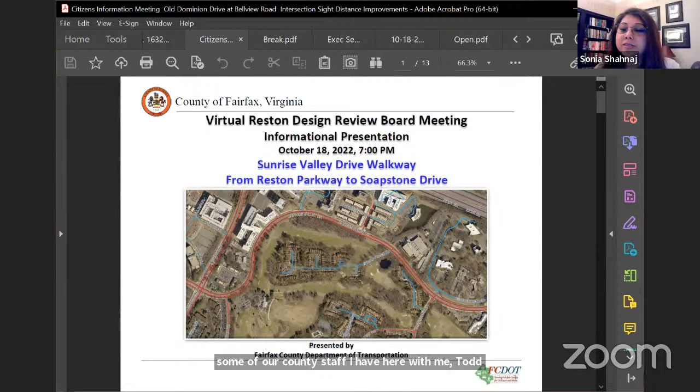I have Nicole Wynand, our bicycle coordinator, and I see Nagin, she's also with our capital project. I also have our consultant, Matt Kaiser and Andy Moy. Can you just show your hand? If you're not here, that's fine.

I am going to start my presentation with a brief description of the project purpose, and then I'm going to go into detail with the proposed improvements. I will take any questions at the end of the presentation. Next slide, please.

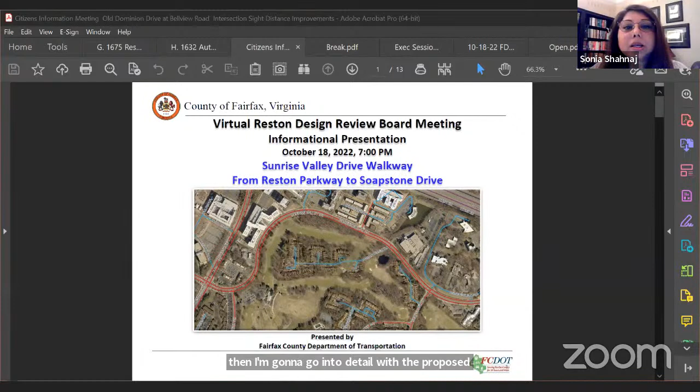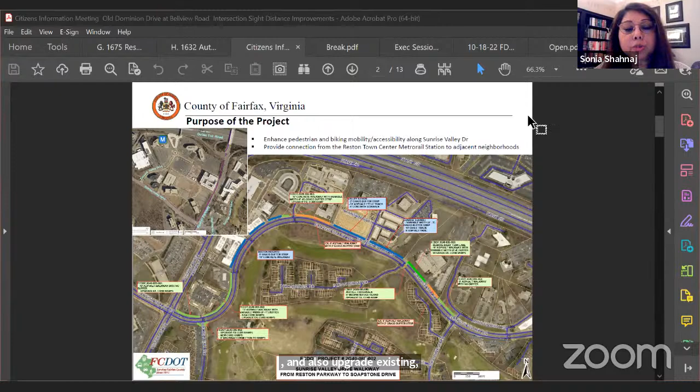Sunrise Valley Drive walkway is a Reston Metrorail Access Group recommended project. This project will construct the missing segments and also upgrade existing bike and pedestrian facility from Reston Parkway to Soapstone Drive along the north side of Sunrise Valley Drive.

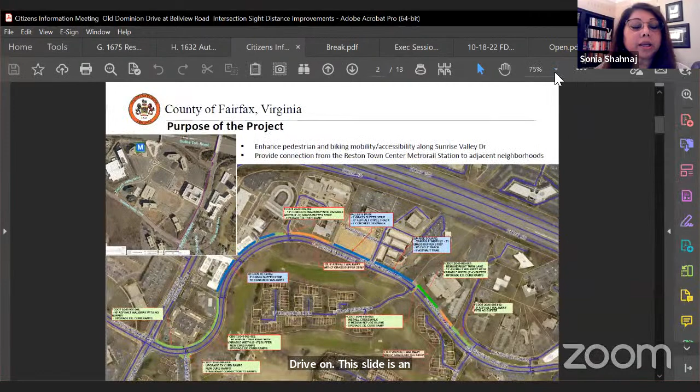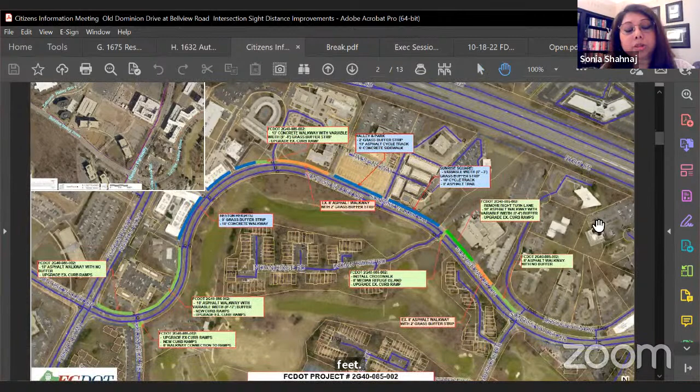On this slide is an aerial photograph of the existing bike and pedestrian facility. The blue line on this aerial shows the recently constructed bike and pedestrian facility as part of the new development. On the left, the blue line shows an 8 feet buffer strip for a 10 feet concrete walkway installed as part of the Reston Heights development. On your right, the blue line shows a 10 feet asphalt cycle track with 6 feet walkway installed as part of the multifamily residential development.

The orange line shows the existing 8 feet asphalt walkway that are in good working condition. In the middle of the aerial photograph, you can see the 8 feet asphalt walkway east of the hotel entrance. On your right is also an existing 8 feet asphalt walkway with 2 feet grass buffer west of Association Drive.

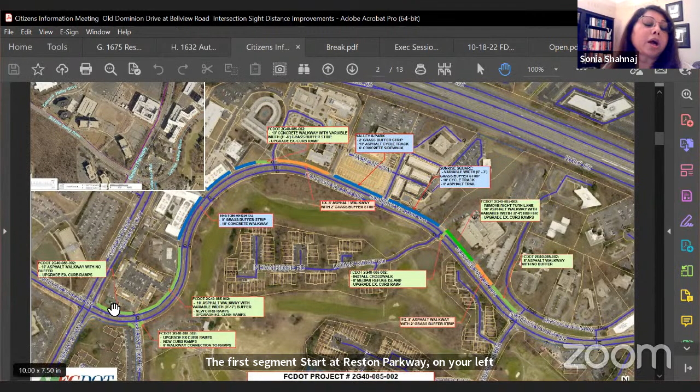The green line shows our proposed development in 3 segments. The first segment starts at Reston Parkway on your left. It will be a 10 feet asphalt walkway with variable buffer, which will connect to the Reston Heights facility. We are also going to upgrade the existing curb ramps and install new curb ramps shown in green at Colts Neck intersection. The second segment is by the hotel entrance, where we're replacing the 5 feet section with a 10 feet wide concrete section.

The green line in the middle is by the hotel entrance, where we're replacing the 5 feet with the 10 feet. On your right is our third segment, where we are installing a new crossing at Indian Ridge Road. We're also installing a 10 feet walkway between the entrance to the commercial office building with a 5 feet buffer. And lastly, we are replacing an existing 4 feet section west of Soapstone Drive with an 8 feet asphalt walkway.

Once complete, this will provide continuous pedestrian and bike facilities along this corridor. It will also provide connection to the metro rail station shown on your left on the inset, on the top left corner of the inset.

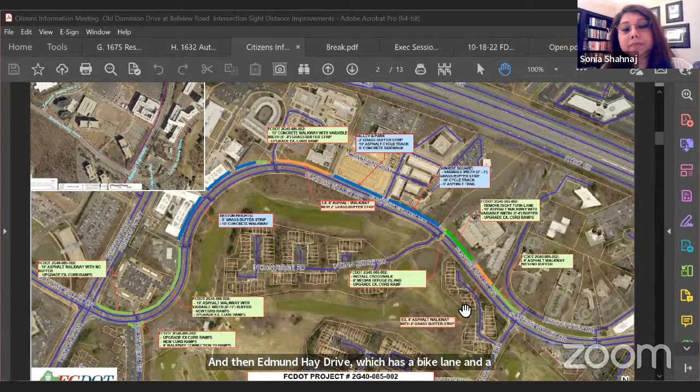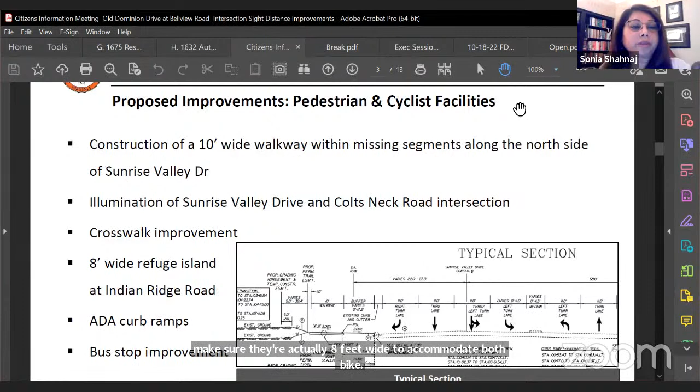As I just mentioned, we are going to install a 10 feet wide walkway within the missing segments along the north side of Sunrise Valley Drive. We are also going to upgrade existing facilities to make sure they're at least 8 feet wide to accommodate both bike and pedestrian traffic. Below is a typical section of the 10 feet walkway. We are providing a variable buffer between the existing curb and gutter section and the new walkway. We are also including additional safety improvements, including illumination of the Sunrise Valley Drive and Colts Neck Road intersection.

We are also including a high visibility crosswalk within our project scope. An 8 feet wide refuge island will be installed at Indian Ridge Road, which I will show later in detail, for pedestrians crossing multi-lane Sunrise Valley Drive. Throughout the project, all the curb ramps will be widened, and we'll make sure that they are ADA compliant. We're also improving the bus stop within our project limit.

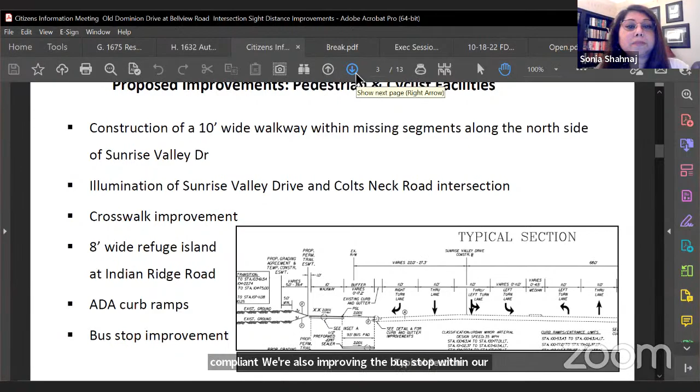This slide shows the proposed design plan for the 10 feet walkway at Reston Parkway. The walkway will be an asphalt walkway and is shaded in green. The orange and red lines are the existing utilities in this area. You can see there are lots of utilities, and I have counted at this intersection, at the corner, there are as many as 30 different lines at this location. The light browns represent the existing office building.

The 10 feet walkway is curb-abutted on the west of the entrance to the office building at Colts Neck, and this is to avoid and reduce utility impact.

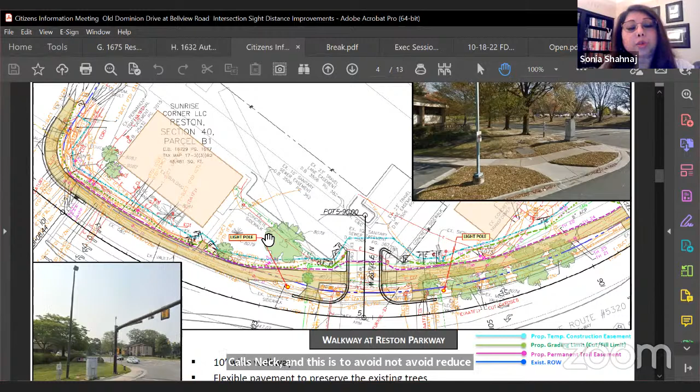Initially, we proposed an 8 feet section on the west of this entrance to the office building, to avoid the relocation of the signal pole and cabinet shown in the picture at the bottom left of this slide. We updated our design. Now it is a 10 feet walkway section based on the recommendation that we received from the Supervisor's Office, Reston Association, Transportation Committee, as well as Fairfax Bike and Fairfax Association for Better Biking.

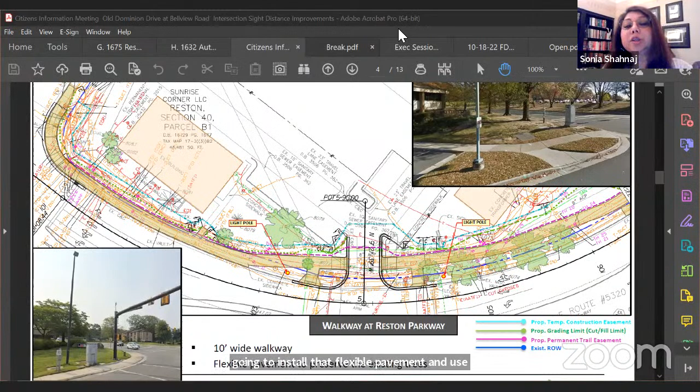We will have to adjust the signal pole and the cabinet to accommodate a wider ramp at this intersection. On the west of this entrance, we are providing a wider buffer, and we're also going to install flexible pavement and use other tree-saving techniques to save the trees, as shown in the picture at the top.

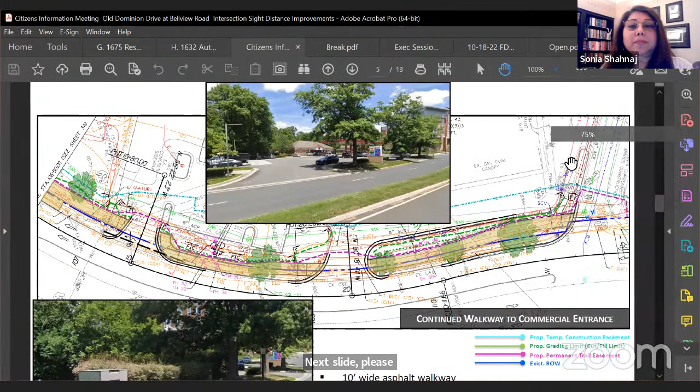This slide shows the continuation of that 10 feet wide asphalt walkway all the way to the gas station. We are making sure our ramp aligns with the existing facility at Reston Heights. The walkway is again curb-abutted because it avoids the relocation of the transformer, shown in the picture at the bottom of this slide. At the top of the slide is a Google Street view of the gas station. We are removing their second entrance on the east.

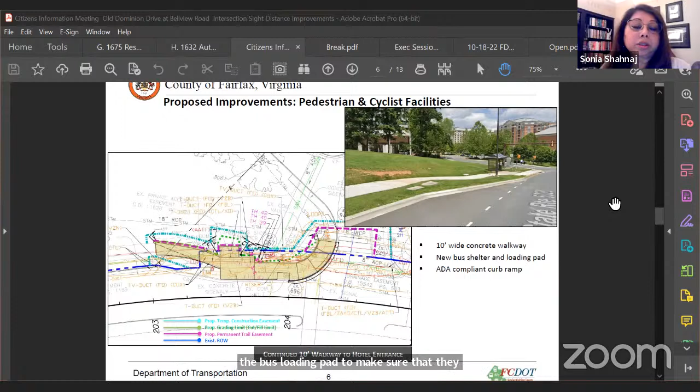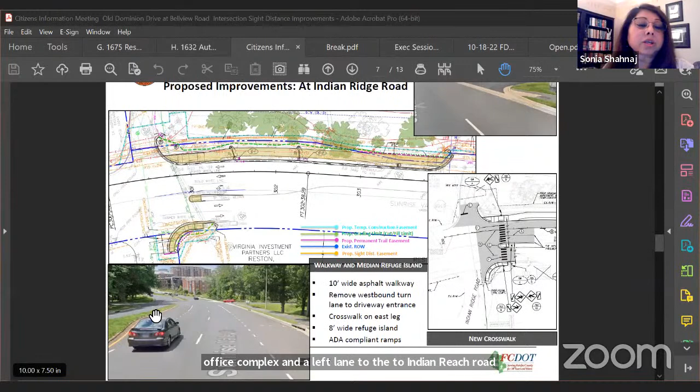Below is a picture of Sunrise Valley Drive at Indian Ridge Road. As you can see, this is a 6-lane section, including the right lane to the office complex and a left lane to Indian Ridge Road. We are proposing to remove this turn lane for a shorter crosswalk width. This will provide a safer crossing. We have prepared a traffic study which supports the removal of this turn lane.

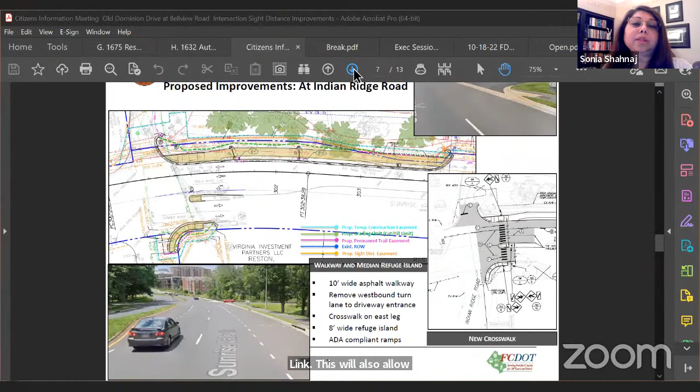This will also allow us, if you scroll up a little bit, to align our new crosswalk with the existing crosswalk, as you can see on the top of the slide. This will be an unsignalized crosswalk, so that's the reason we want to make sure it is safe.

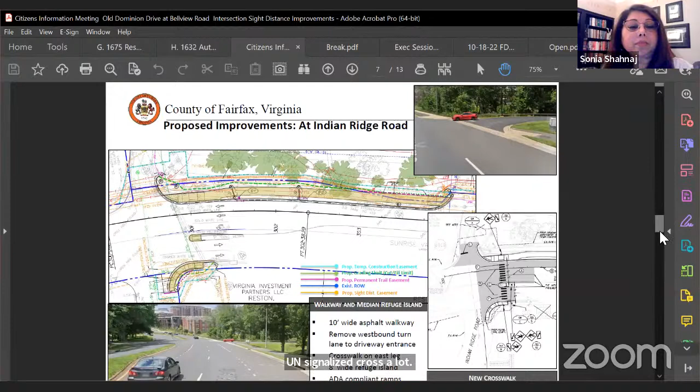This is our last segment of improvement, where we're replacing the existing 4-feet section, as you can see from the picture below, with an 8 feet wide asphalt walkway all the way to Association Drive. This will provide a continuous 8-feet section to Association Drive. You can see the picture at the bottom. This is an existing 8 feet asphalt, and we're replacing that 4-feet section.

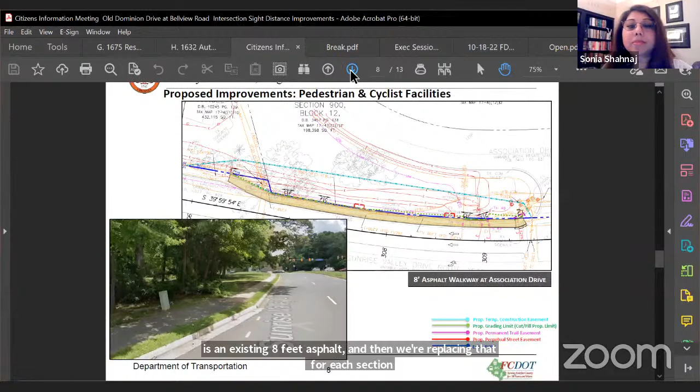This slide shows the location of the new light pole at the Colts Neck Road intersection. We are proposing new lighting to illuminate the crossing at this intersection. The lighting fixtures and pole will match the current Reston area lighting fixtures. The light pole is going to be a dark bronze finish with a smooth tapered pole. The fixture will be a shoebox style with LED luminaire, also with a dark bronze finish. We are coordinating with our streetlight division and also Dominion for the lighting design.

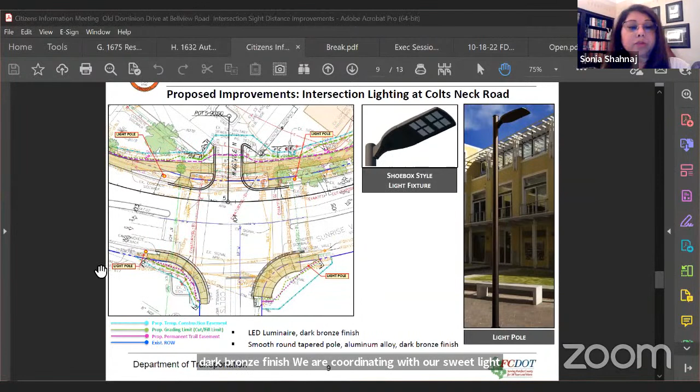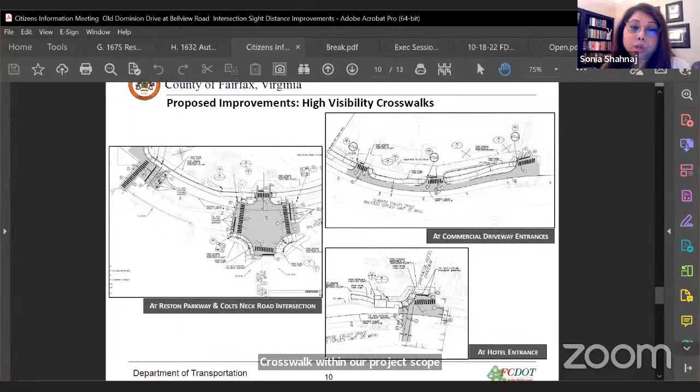This slide shows the proposed high visibility crosswalks within our project scope, in addition to the one at Indian Ridge Road. On your left are the high visibility crosswalk at Reston Parkway on the west leg of Sunrise Valley Drive, and the high visibility crosswalk at the Colts Neck intersection. We are also installing 8 APS pedestrian signals for the 4 crossings at this intersection.

On your right are the proposed high visibility crosswalks on the driveway entrances all the way from Reston Parkway to the Reston Heights development. At the bottom is the proposed high visibility crosswalk at the hotel entrance. The existing sidewalk and crosswalk in some areas are standard 2 parallel crosswalks. We are improving the existing crosswalk with a high visibility crosswalk in some areas, and also installing new high visibility crosswalks.

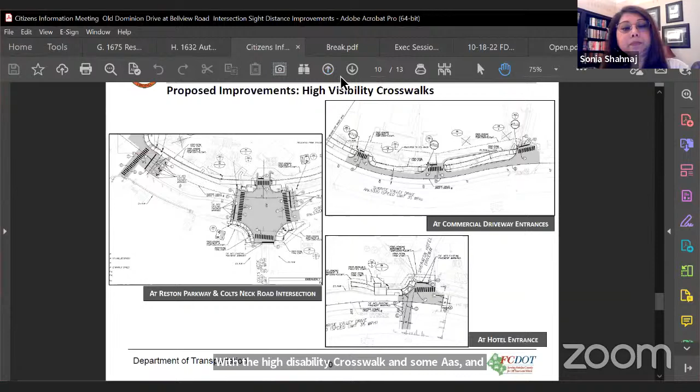We will need land rights for our proposed improvements. This slide shows the type of temporary and permanent easement that will be needed for this project. The blue line shows the existing right-of-way.

The trail will be maintained by the county, so we will need a permanent trail easement for the perpetual maintenance of the trail, shown in purple. The green line shows the proposed grading, and the lighter blue or turquoise line is the temporary construction easement for the grading. Once construction is complete, this temporary easement will go away.

We will also need sight distance easement, not shown on this plan, at Indian Ridge Road for the new crossing, and some perpetual street easement by Association Drive to relocate some of the existing road signs.

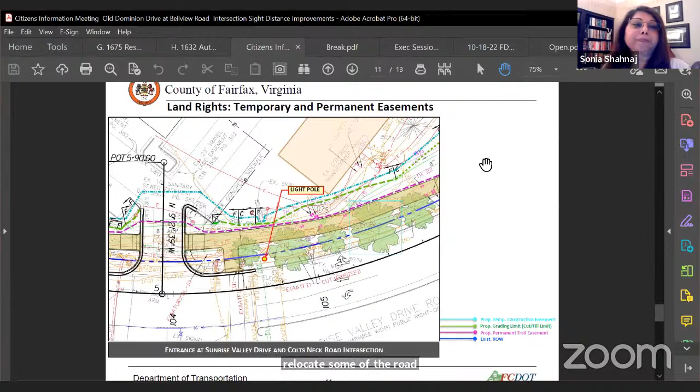We are finishing up our final design and should complete it by next month. We have already started our plat and utility coordination.

We will initiate land acquisition once the plat is complete. We should start the land acquisition process by winter 2022 and expect to complete it by winter 2023. Initiation of construction bid advertisement is fall 2024. Once utility relocation is complete, we expect to start construction by winter 2024, with scheduled completion by fall 2025. This concludes my presentation, and I'd be happy to take any questions or comments.

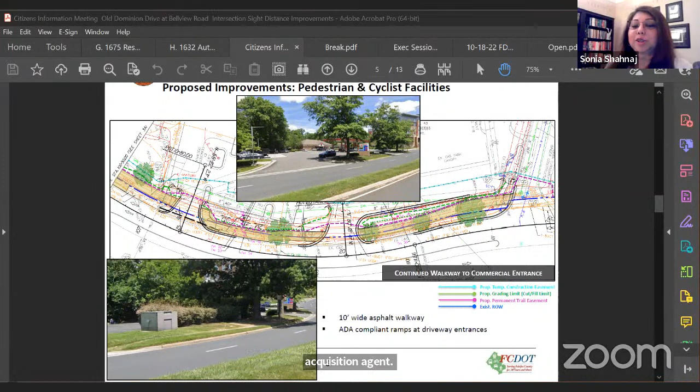Is that something that can—I know you said you have compensation for trees that potentially would die—but what about these trees that are part of the compensation package you're giving to the property owner? Yes, so we have not started that discussion with the property owner yet. It starts once we finalize our plats.

Sarah, our land agent, explained she's been out to the property several times to see where the impact will be, in addition to reviewing the plans. When she makes the offer to the gas station, they will be compensating for the loss of trees, or offering to replace them with trees of their choice from a list. How they choose to rectify that is a personal decision for the company. We can't legally bind them to replacing those trees once we've compensated them for that loss.

I don't know if Tony's on, but I believe I, as the DRB, can tell them no if they came to me and said they want to cut down 4 trees on their property. There might be a way I can parlay that together with a requirement on our end, because the only reason these are the 4 trees I'm most concerned about...

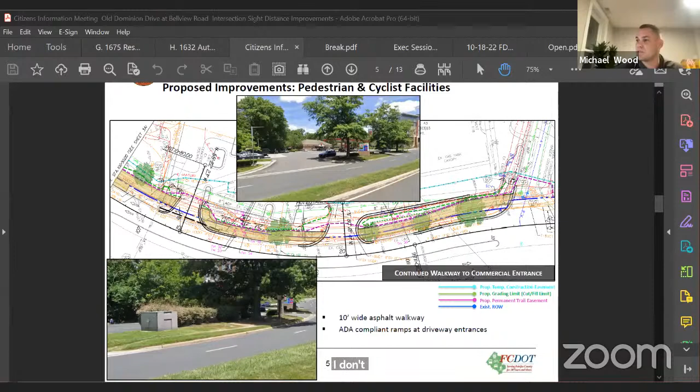I'm excited for you guys to try some FlexiPave or flexible pavement. I know FlexiPave is one brand I'm aware of, but hopefully it will work and be something you guys can implement in other places. Does any other members have any other comments?

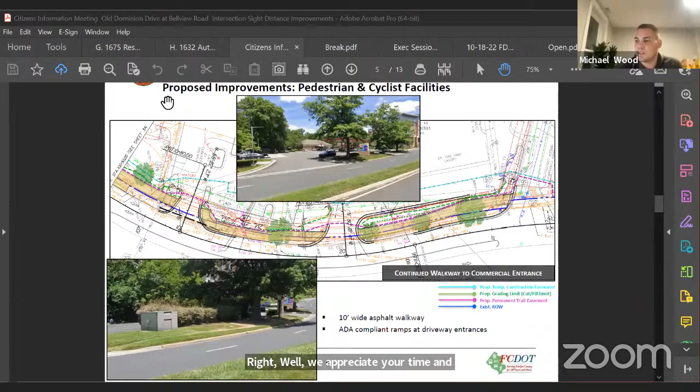All right, moving on to application G, which is 1675 Reston Parkway, Suite J and K. Got a sign application, I believe, or an appeal of a sign application. That is correct.

Did you have the appellant here, Daniel? Daniel, if you're on, could you raise your hand? Mr. Lowe or Mr. Pence? If you're calling in by phone, you can unmute yourself by dialing star six.

Did you want to defer to the end? I could give them a call. I see someone on, last 3 digits is 519. And they're not muting. I don't have anyone else.

Okay, well since it's an appeal, I can't really accept the application unless they're here to appeal it. So I'll make a motion to defer it to the end of the agenda and give them some time to get on. Do I hear a second? Second. Second. All right, we have a first and a second.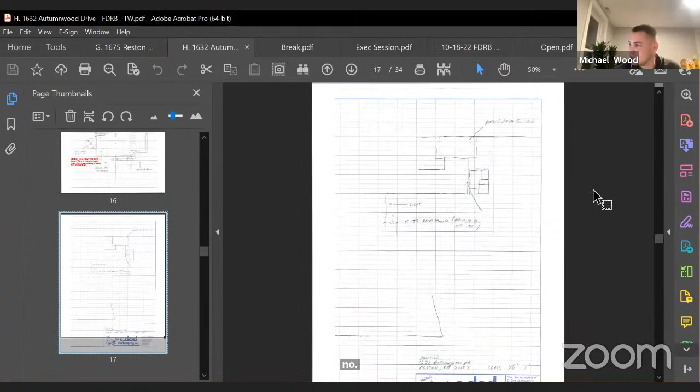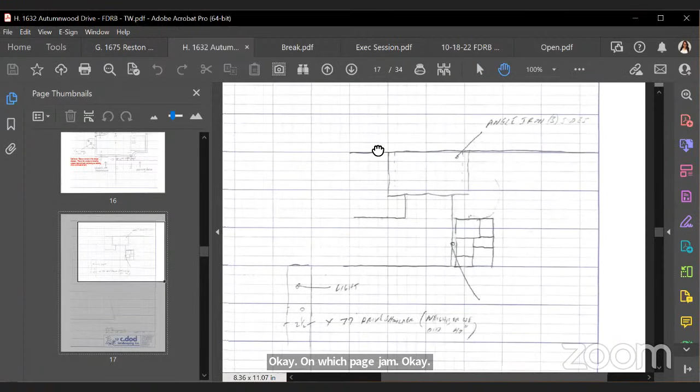So I don't have any questions minus that width of the driveway border. Yeah, it does say 2 2/3. I'm looking at it as well. The drawing on page 17 shows 2.5 by 77. Okay, on which page, Cam? We're pulling it up now, but it looks like 2.5 by 77. Okay, yeah, so we'll just want to clarify exactly what that is. Getting closer to 3 feet is a little big, but with the paver it may make sense to do 2 feet 8 inches, and that might be why that was one of the dimensions. It might work out perfectly where you have a nice cohesive design. I'm sure there was some thought behind it because it's a bit of an odd dimension request. Yeah, so there might be a reason why they did that size.

So what I'll do is put in the motion that we can clarify 2'6" to 2'8", depending on final paver arrangement or something like that. Okay, does anyone have a motion they want to make? Any discussion that we want? I'd like to move that we approve the revised design.

Okay, we have a motion. Do I hear a second? Second. We have a motion and a second. The only thing I would ask is that we basically say the dimension is anywhere from 2'6" to 2'8" based on paver arrangement. Do you accept that amendment, John? I do. And Brian, do you accept that as a seconder? Yes. All right, we have a motion and a second, we've had some discussion, we had an amendment. All those in favor of the application, say aye. Aye. Any against? Any abstentions? All right, I believe that motion passed, I think we have 8-0.

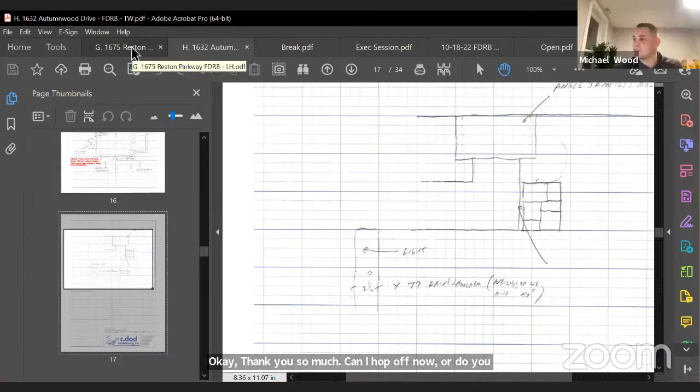All right, thank you so much, Michelle. Okay, thank you so much. Can I hop off now, okay? Do you need me to stay on? You're good, no, we're good. All right, thank you so much. Yep, all right, appreciate it. Thank you, bye-bye.

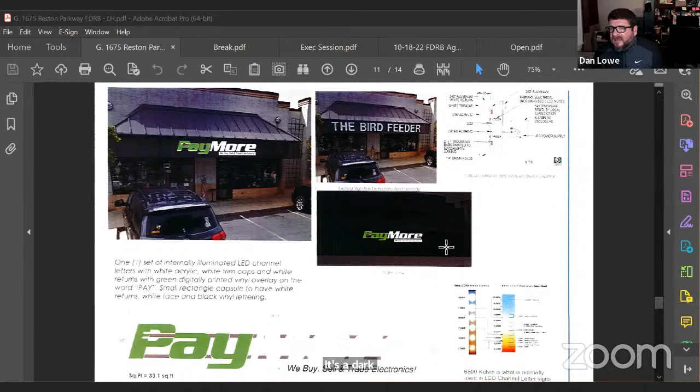Okay, and when you say it's black, are you saying it'll match the awning color, like a black, or is that like a dark bronze? It's a dark bronze, so the lettering won't match that. No, it'll be a black. It'll be a black. Okay, so the words within white, with white words. It'll be white words within a black. Correct.

All right, let me go around and see if anyone has any questions on the sign, and then we'll go from there. I swear this center, all the lights are only white. Are there colored signs in this center at all?

There are. NTB has a colored sign, Senor Ramon's Taqueria too. The newer locations that have opened have started to add color to their signs, but originally the center was all white channel letters. The Home Depot sign is an orangish color as well. But originally, years ago, the bird feeder's been there since 1993, I think. It was the original tenant in that space.

Can I just say that, at least for myself, when we approved this by acclamation, I totally missed the 3,000 Kelvin. That won't produce a white light sign. He's correct. I appreciate that.

I was a bit puzzled myself and figured it had to be something, because all the white signs in there, they couldn't have been done with a 3,000 Kelvin bulb. First of all, I apologize for making you come back for that. And, but...

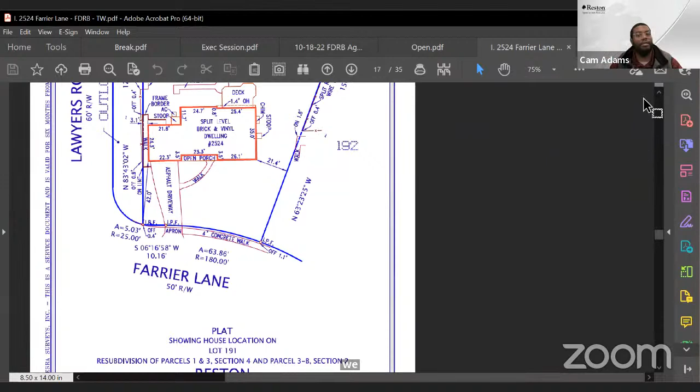Okay, so the new information you're presenting - I'm paraphrasing - is that other neighbors in the neighborhood have board-on-board fencing. Staff, correct me if I'm wrong, but I swear last time you guys had a whole map showing which ones were actually approved by the RA and which were not. I don't see that. We have a map, but on page 15 it shows the properties, and we responded to each property and why they had the fence that they had. Yeah, but where is that now?

We didn't mark it ever. We documented it in a document for the DRB. In the doc for the DRB. So where is that document? It's in the doc that's presented to the DRB, in the actual doc you get with your applications, in the Dropbox - my Word document is what you're saying. Correct.

Let me go to that real quick, because that's what I wanted to reference - I'm trying to remember, because this is a deferral of an appeal, which means we didn't accept the appeal, but I believe we gave you guys some time to maybe rethink the design of the fence, but it sounds like that didn't happen - it's still full height all the way around.

I think we were at the panel, and when we discussed what you had asked us, what we had discussed and said, we had proposed a solution that we thought met the guidelines by running the board-on-board along Lawyers, turning the corner to give some concern for the privacy, but continuing in accordance with the guidelines with the split rail - there was already split rail along the neighbor's border, so it would be essentially closing off the corner with board-on-board, and then continuing to meet the neighbor's split rail. That's what we had discussed as an alternative.

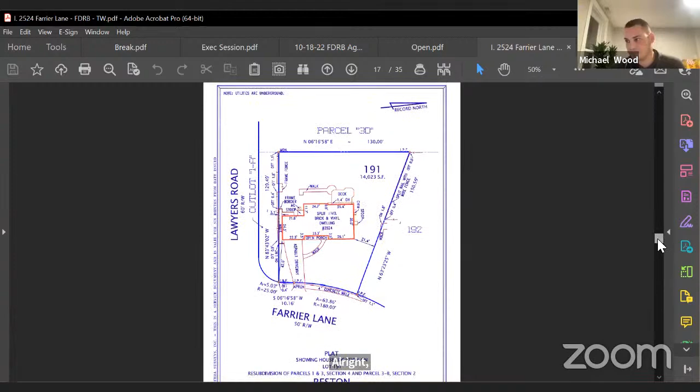All right, so we'll hear the application over again. I think we have a lot of the information.

My understanding of this is I'm all for the board-on-board fence against Lawyers Road. I'm even for turning it around the corner. I think the biggest thing that I remember suggesting, and I don't know if this was ever dug into, I'm just going to jump into it.

Did RA sign this application as an adjacent property owner where a fence is going on the property line? And was that addressed? Did the neighbor sign for the property where this is going? I guess they're proposing a fence directly on the property line once again, and there's already a fence there. So I'm a little confused exactly how that's going to work and what the plan is for maintenance, and our guidelines typically require it.

So did RA sign this application as an agreement? RA: No, we did not. Is there a reason why not? To my knowledge, we have not been requested to sign the application.

But also, our pathways supervisor, who usually sends a comment to support DRB applications, has been out. So that may have also had something to do with it, but we've not been asked, to my understanding.

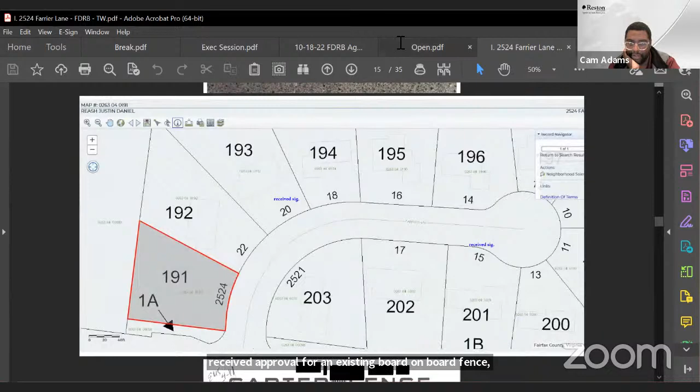Several things. One, slide 15 shows the properties and property lines. The owner received approval for an existing board-on-board fence, which is the design on page 26, that borders Lawyers Road. The proposed fence design on page 18 is inconsistent with that existing design.

In addition, the DRB has customarily always reviewed applications for privacy board-on-board fences and has stipulated that board-on-board fences should be for areas where the fence or property line borders a public roadway. So in this instance, the applicant already has what the DRB has deemed appropriate for 6-foot board-on-board fences, and the existing design does not match the proposed design and style.

In addition, the signature requirement for the adjacent property was a concern due to the applicant sending the application certified. The applicant did not get the signature of the adjacent property. The applicant is also proposing basically wing fences on either side of the property, to the left and to the right, and the adjacent property also has a split rail fence, so that connection would be inconsistent.

We understand and acknowledge the concerns related to trespassing or being in a dangerous situation with little children. But we want to make sure we are consistent in applying the design guideline to all properties of Reston Association. Therefore, the DRB, and hopefully the applicant, is encouraged to look at other alternatives that would be more consistent with the design and have a uniform and harmonious appearance, but also address the clearly defined rule that the DRB has had consistently: privacy fences only bordering adjacent roadways.

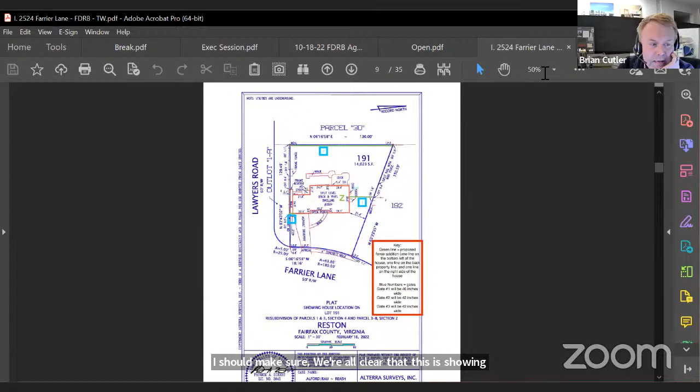Brian, any thoughts or comments? Maybe I'm the only one who needs clarification, but for Michael, could you go to slide 9? I just want to make sure we're all clear that this shows they're only proposing the fence in the back and on the front two sides, not next to the adjacent property owner with the split rail fence. Yeah, I think that's correct. It seemed like there was some question about putting another fence in there—maybe I misinterpreted that.

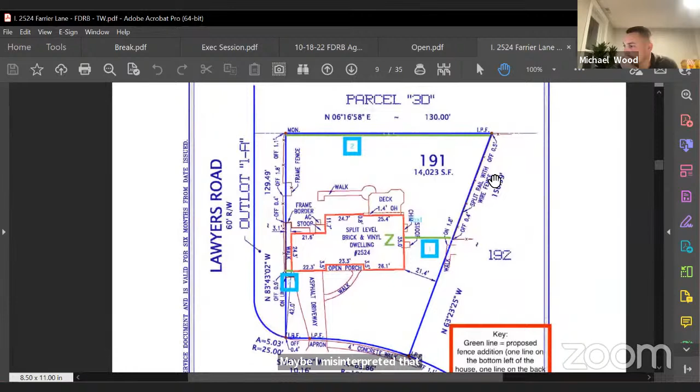That makes sense. I think the applicant may have misspoken—previously it was going to be that the rail fence would be maintained with the existing rail on the neighbor's side, but when the applicant spoke this evening, they mentioned the whole yard being board on board. So maybe the applicant can clarify what they're asking.

Happy to clarify. In the design layout, the green lines show our proposed new locations for the board-on-board fence. That covers the entire back property line, and on the front left side of the driveway, extending to the neighbor's property line. But there would be no board-on-board on the right side where the split rail is—that will just remain as split rail.

Can I ask a question? Thank you for that—yep, go ahead, Elena. I'm sorry, I thought I was next. No, Brian was next. You're good, Elena, go ahead. I needed that, Brian—I was confused as well.

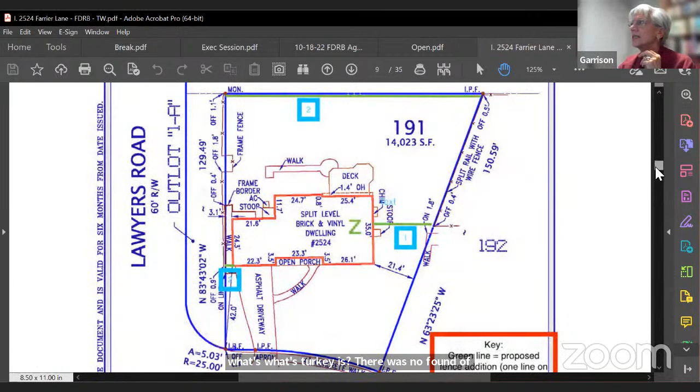Is that a question for staff? Staff looked back at the approved ones. What's tricky is there were no found approvals for some of those locations. I thought there was one for number 10—2510 had an approval.

Is that where the pool is? No, it was a different one—I believe they had a pool though. It was approved, originally denied but approved on appeal. 2510 Farrier Lane had no pool, and it was approved because of an already established pattern of board-on-board fencing on adjacent properties. The design guideline says the fence design should be consistent or compatible with other DRB-approved fences in the neighborhood.

Typically if someone had a new application and there were no fences in the area at all, we might ask them, in the front of the neighborhood especially, to use privacy fences that are 6 feet tall, since those in Reston are meant to block noise from heavily trafficked roads. That's the typical reason, or if somebody has a pool that needs a taller fence. But typically what I'd request in the front yard is the same style of fence, just stepped down in height, to something like a 42-inch high fence.

Yeah, sir, sorry to interrupt, but that's totally fine, Mark. I think that's a fair point. Just correct, but let me finish my comment.

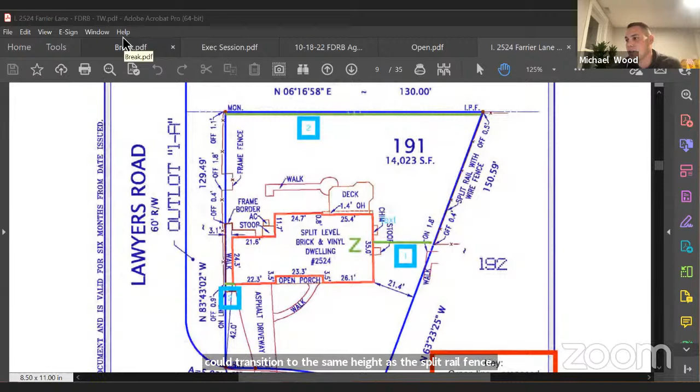I think that could be an option. I'd be okay with keeping that same height split rail in the front, around where marker number 1 is now, doing the board-on-board fence since that matches the topology of your house, but keeping it the same height as the split rail. I think I could get behind something like that. But the key is making that transition a little bit in the back, because it's a fine line between open space and not open space.

And then obviously there's the whole issue with the property line and it being too open, RA space. Typically we require an 8-foot buffer if you want to build your fence, or you need some sort of specialty approval, and it sounds like the person who handles that is maybe out. Cam, is that accurate? At the time of review of this application, yes, they were on extended leave.

So I personally think taking a fence around a corner and then changing it is a lot less aesthetically pleasing than changing it at a proper point. You're going to end up with three changes — the tall one as it turns the corner, then it goes down, and then it goes to split rail. I think that's inconsistent.

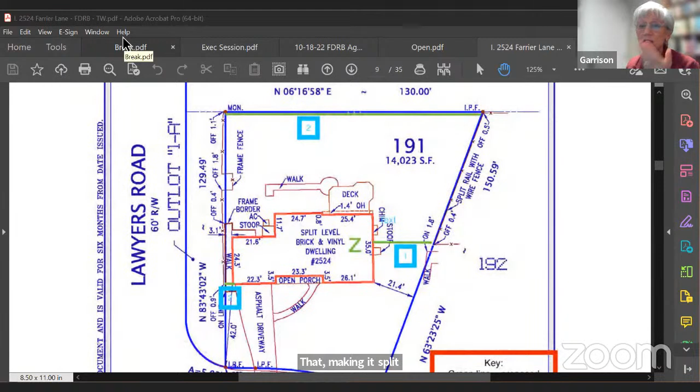I could live with it, though I think it's kind of weird to step down lower on the Lawyers Road side, since it's only about 3 feet, 3'1". So if you want the gate to be lower than the fence, assuming there'd be a gate there, that's fine, but if there's no gate, changing the height there seems odd. I'd agree that making the portion between lots 191 and 192 split rail makes sense, since it's right next to the existing split rail. In the back, I don't think the height change is that big a deal — you'll have to transition somewhere anyway. That's my opinion, but I do agree it should be lower on the east side of the building if north is up; it shouldn't be 5 or 6 feet tall.

Could I just say why we talked about turning the corner? It's because that was really stretching the rule. The rule is it has to be split rail, so if we're applying the guidelines consistently, it would all be split rail along there.

I don't think the rule says it has to be split rail — it says it has to be consistent. There are people right across the street who aren't backing up on Lawyers Road with an open wooded area, and we consistently apply split rail in that situation. Plus, it has to be off the property line from the road, which we haven't addressed in this application.

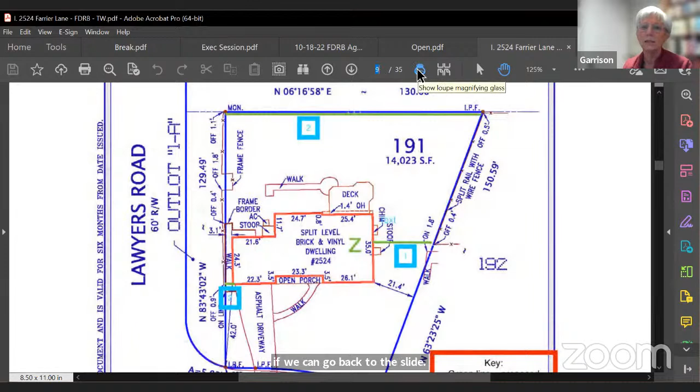Okay, but if you look at the other — if we could go back to the slide, I don't remember which one, the plan of the whole neighborhood. Don't know where it is... page 15, thank you. If you back up so we could see it.

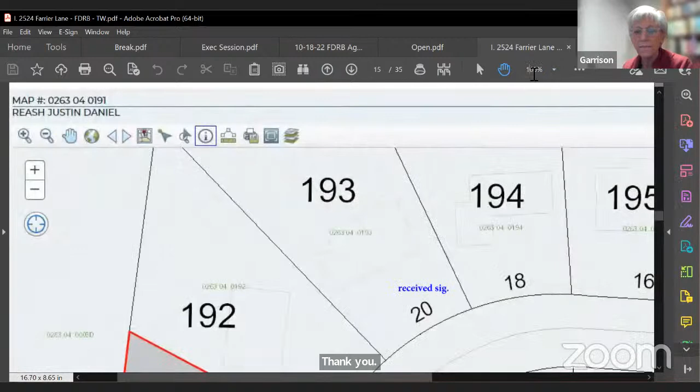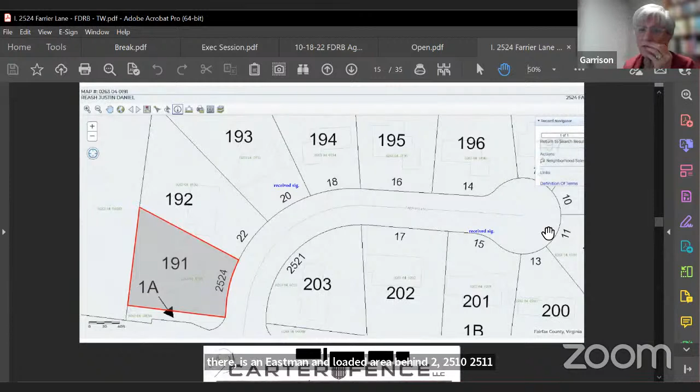So again, this doesn't show it, but if you look at it on Google Maps, there is an easement and wooded area behind 2510, 2511, and 2513. It's narrow, but they all have board-on-board fences. But we also don't have approvals.

Would it be helpful to pull up the design guideline? Yes, let's bring up the design guideline. Can we stop sharing and pull that up?

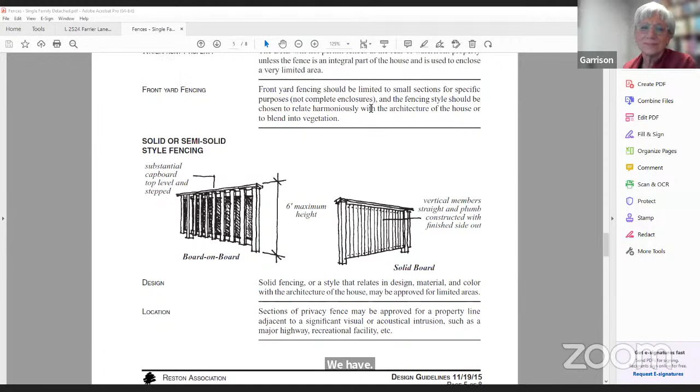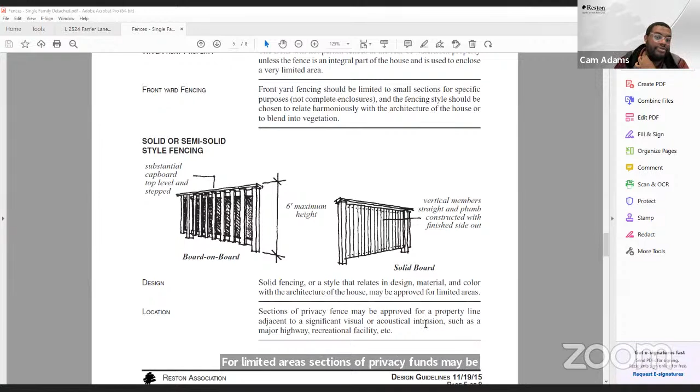Can everyone see that? So it says solid fencing or style that relates in design, material, and color with the architecture of the house may be approved for limited areas. Sections of privacy fence may be approved for a property line adjacent to a significant visual or acoustical intrusion, such as a major highway, recreational facility, etc.

So that's where I think I was trying to make the argument that we could still say it's an acoustical intrusion, around the corner. We're kind of bending the guideline already. It's already going to have to change fence type. Just my opinion for where we're at.

I personally am still concerned about the property line issue. From what it sounds like, the next door neighbor still did not sign the application. Is that what your affected party status was saying, Cam? That is correct. They were notified via certified mail, but they were not a signatory.

But in his application, he's not actually building anything on that property line. That fence is already there. That is correct. So that doesn't apply. It would just be the RA situation.

Well, just to note, if the homeowner built the fence within the boundaries of the lot instead of on the property line, that would not be an issue. So if they set it in 6 inches, it would be okay. Roughly, usually, but yeah, okay.

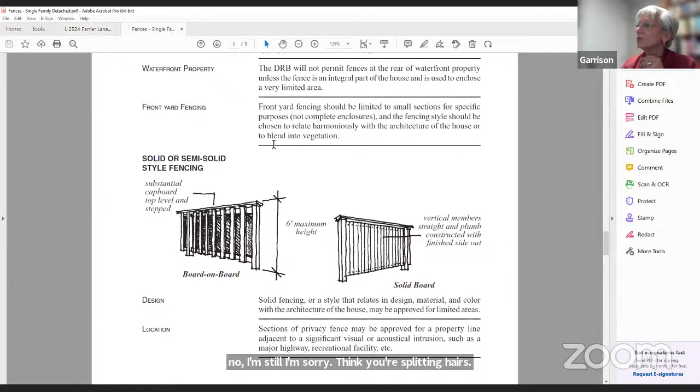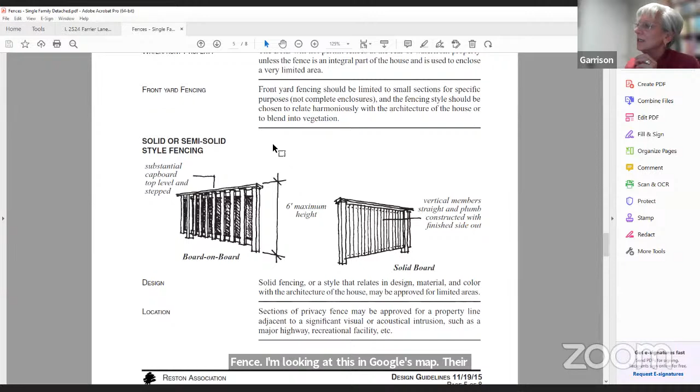Elena, does that make sense with the guideline where we're at? No, I still think you're splitting hairs about turning the corner or going all the way to the neighbor's fence. I'm looking at this in Google Maps. They're deciduous trees. In the winter, he doesn't have much screening from Lawyers Road on his backyard.

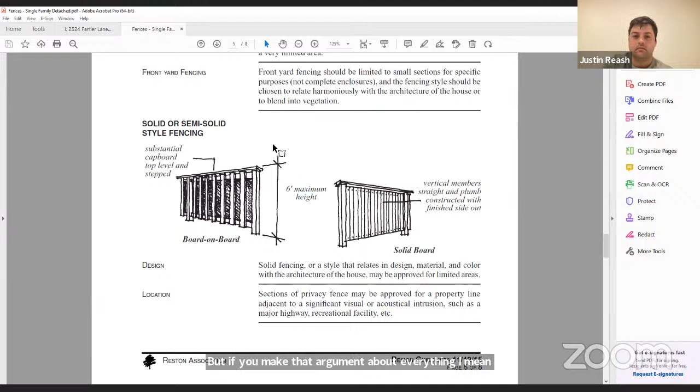May I just say, if you make that argument about everything, then the neighbor could put up a board-on-board fence all the way around the back of their property because they potentially could see the road. Farther away, he is not the corner lot. I mean, this is the corner lot. It's a noisy lot. They're at the corner of Farrier Lane and Lawyers Road. I think there's a difference.

It sounds like Elena might be making a motion. Elena, do you want to make a motion? Well, I'm sorry, who's speaking? I can't see right now.

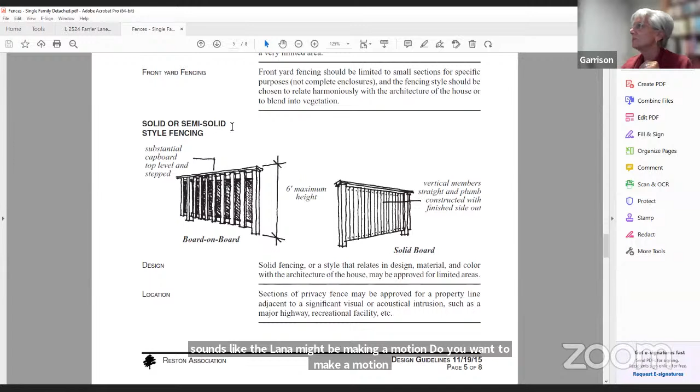It's Cam. I make the motion that the rear yard is substantially different and it is adjacent to a significant visual and acoustical intrusion because there are deciduous trees between it and Lawyers Road. So the rear yard can have the solid board-on-board fence to match the existing. Solid fencing on the side to enclose the area between the existing board and the house. It meets the requirements of a style that relates in design, material, and color.

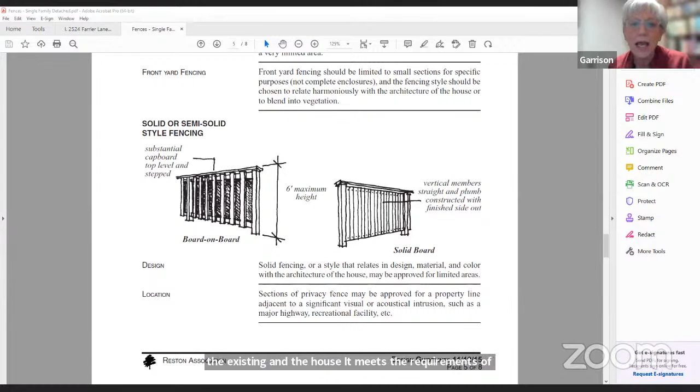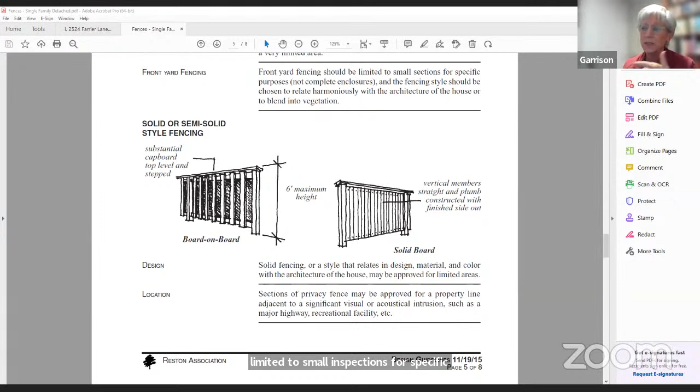Oh no, where is it? Front yard fencing should be limited to small sections for specific purposes, and that's to keep a congruous design. And that the other side, the east side, if north is up on the plat, should be either board on board the height of the split rail fence, so it's not a privacy fence, or a split rail fence matching the existing neighbors.

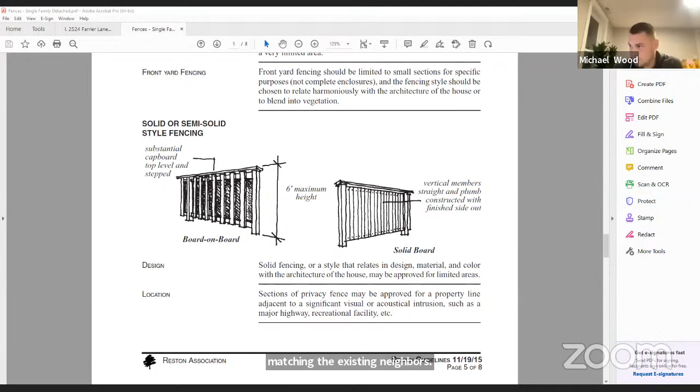All right, so we have a motion. Is there a second? A second. We have a motion and a second. Is there any further discussion?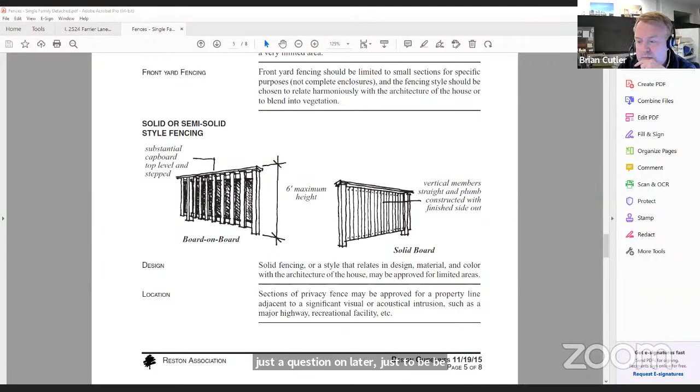Just a question for Elena, just to be clear, the 3.1 foot section connecting from Lawyers to the house, you're suggesting that would be board on board to match the height of the existing fence on Lawyers? It could be lower. I would have taken an amendment that it would be lower if you want. It just seems like a strange place to change the type of fencing, but it's only... Yes, there we go. Perfect, thank you.

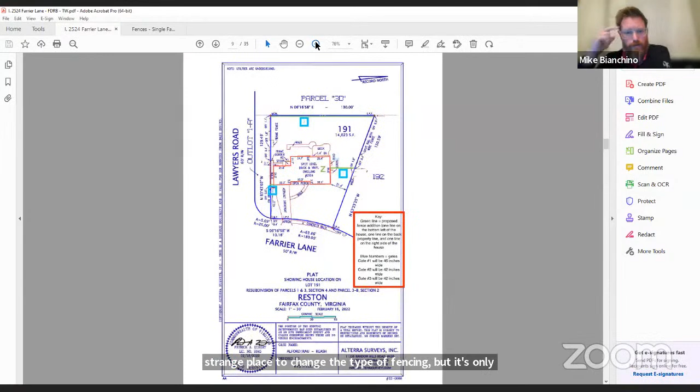The plat says it's 3 foot 1 inch, 3.1 foot, excuse me, not 1 inch.

Yeah, to me it's such a small portion, I would keep it the same height. I think it would look silly to drop it, personally.

Any other further discussion on the motion? Are we concerned about just the rear property line? Yeah, that's what I was going to ask, with clarification of where the motion is addressing where the fence would be built along the property line. I mean, if there's an approved setback, we should stick with the approved setback.

Can we say 1 foot, please? Sure, 1 foot. So, Sarah, amending the motion, are those amendments okay? Sarah, who seconded? Yes.

Could we also clarify the height of that fence in the rear, and is that consistent with the existing fence? I said to match the height of the existing board on board fence, but so it will come to the corner of the split rail and then be at 6 feet. I'm just asking to make sure I understood. Yep.

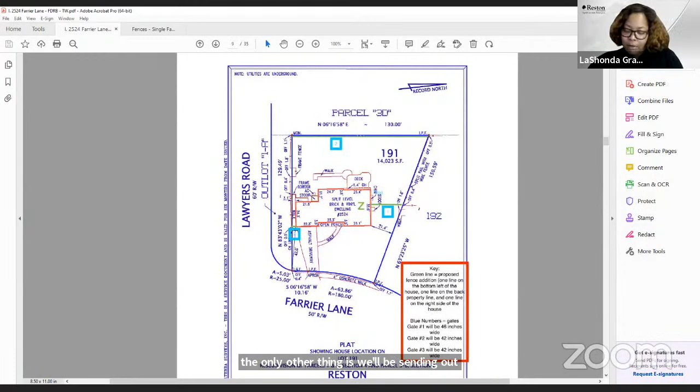Oh, party! That sounds good to me. Send away. Party at Michael's house or what? Who's hosting?